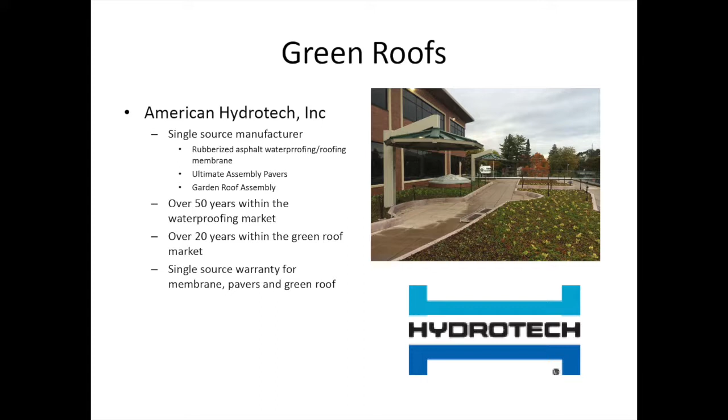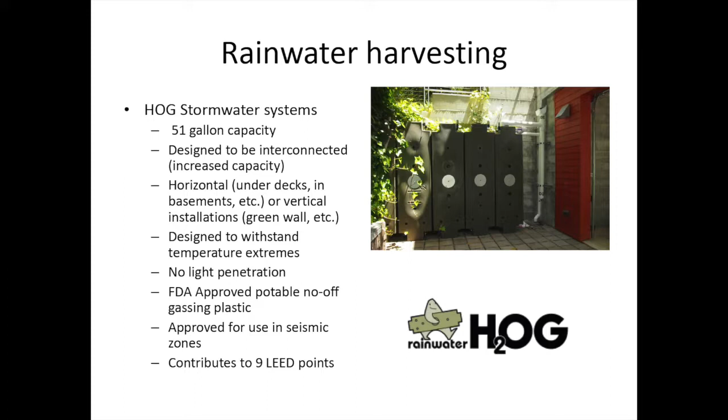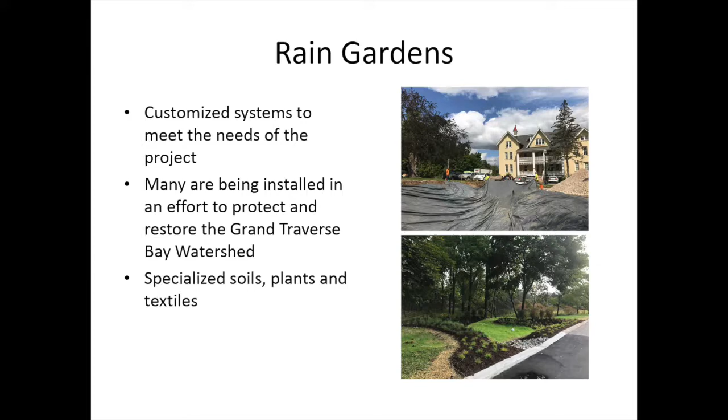Overall, a lot of the green roofs happening on Munson's campus and these rain gardens are all protecting Kids Creek, which is a main tributary to the bay, to West Bay.

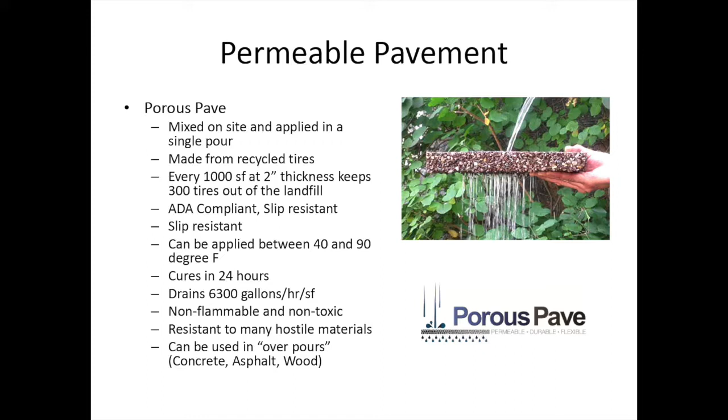Permeable pavement is another thing we get into. This company here is pretty cool—their systems are actually partially made out of recycled tires. Every 1,000 square feet of this product takes 300 tires out of the landfill. You can use this to move water through the system, and again, we're looking at the holistic approach to the roof, or to the site, of managing water.

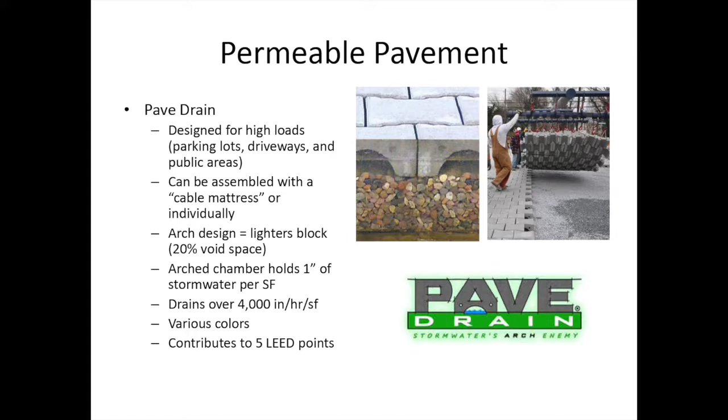Another more heavy-duty system here is called pave drain.

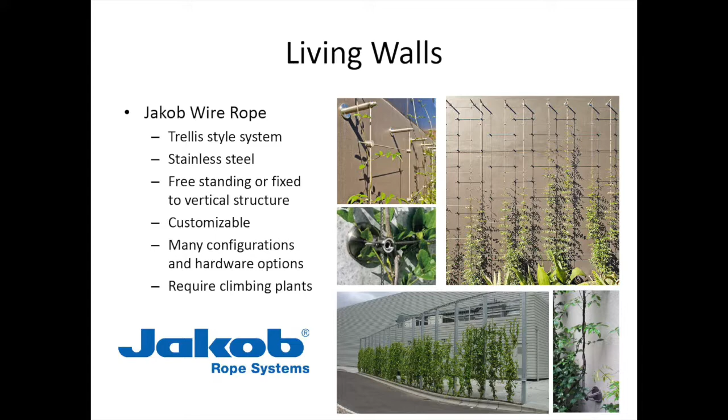Different types of living walls. This one here is a trellis system where vines grow up it, and the plants are actually in the soil and the ground. The main difference between them and these others is the soil, or growing media, is actually in the walls for most of these—these are structural walls that would replace your typical concrete block wall.

Another form of green infrastructure.

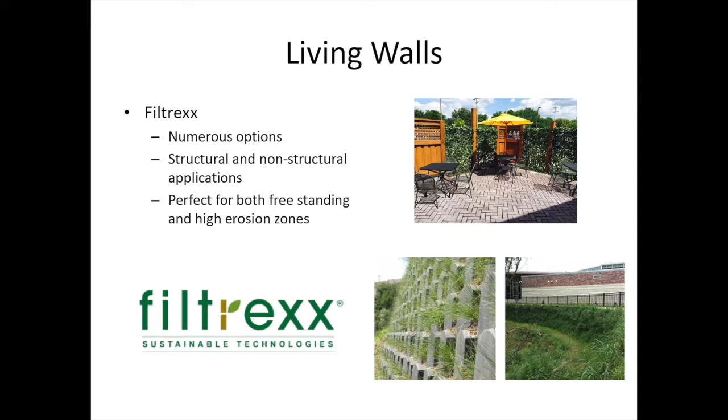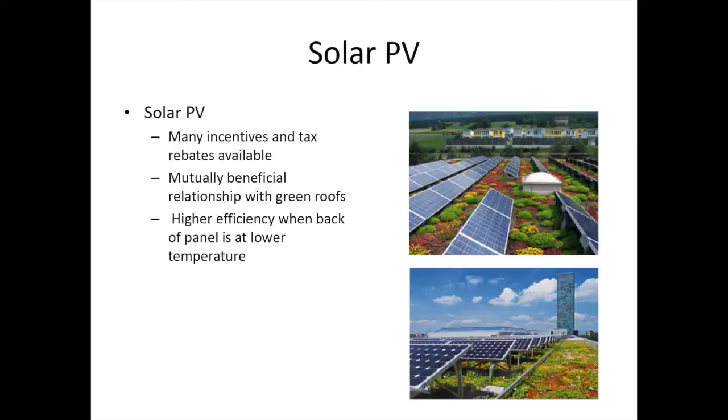We also consult on solar PV. You can see these here—these aren't our jobs, but they're from Germany. There are tests out of Germany and the United States that show solar panels actually producing at a higher efficiency than they do without green roofs, because the evaporative cooling effect of the plants cools the back of the solar panel and makes it more efficient. So it's a symbiotic relationship between the two, and overall it's a good double use of your site—you're managing stormwater and generating electricity.

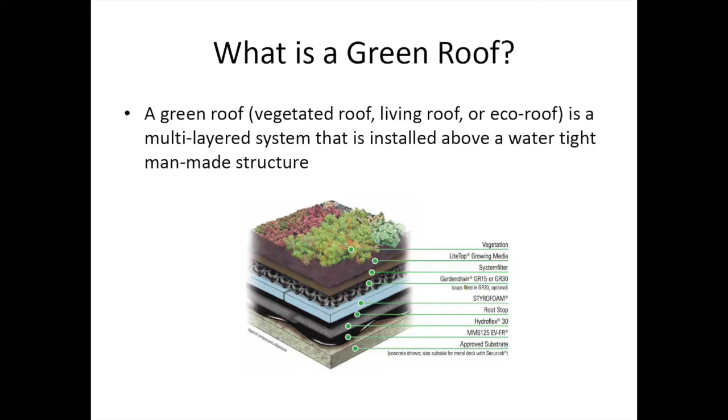So what is a green roof? The official technical definition is that a green roof is a vegetated, living, or eco roof, and it is a multi-layered system that is installed above a watertight man-made structure. So basically that's over waterproofing, and there are many layers that you need to consider.

I'll have this up here so anyone that wants to come look at it after the lights are back on can do so. But basically the bottom layer is your roof deck—that can be concrete or it can be wood. That's your roof.

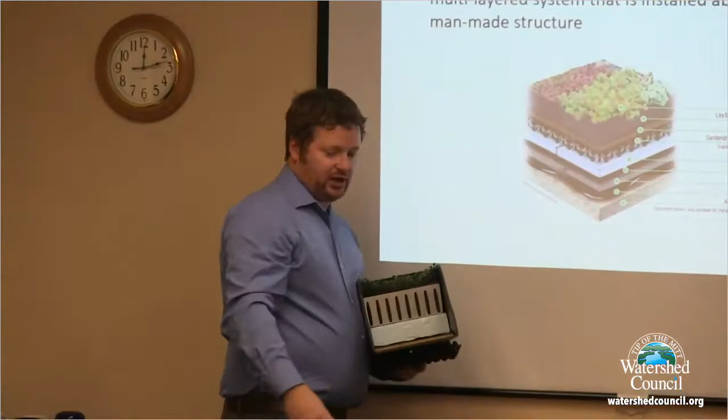And then you have your waterproofing layers, a root barrier, insulation, and your drainage board, which is here—this is going to hold water as well as drain it. Then you have a fabric that keeps all your soil from washing away, and your plants on top. So it's a lot of layers, but it's all there to mimic the functioning of the first few feet of soil at grade.

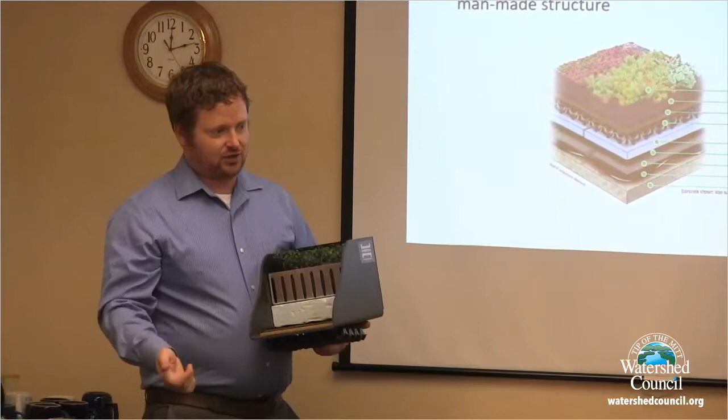It's going to drain, it's going to retain water, it's going to support plant and root growth with various pore spaces. There's air within that soil, so the plants and roots can breathe, and it's a really healthy environment. It's an engineered environment, but you're on top of a building, so it has to be engineered to do that. I'll keep this up here, and feel free, we can pull it all apart and check it out afterwards.

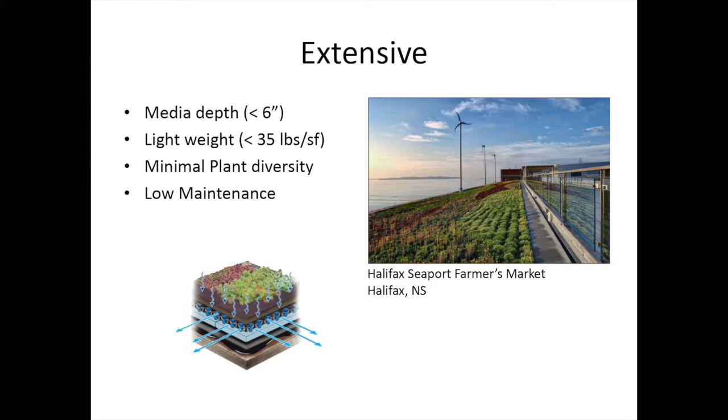So there's different types of green roofs. This one here is known as extensive—it's a shallower roof. There are two main types: extensive and intensive. And how I always remember that is intensive is heavier, so think of more intensive weight—that's a deeper system. But this one here is a lighter weight system.

It's less than 6 inches of soil or growing media depth. It weighs less than 35 pounds per square foot typically. The plant diversity is minimal, and that's because the root systems of the plants are shallow. So you can't plant a big ornamental grass in 6 inches and expect it to live, because its roots have nowhere to go. So that's where you're cutting off the diversity of plants, to anything that can survive in 6 inches or less of soil.

There's a lot there, but it is a more limited palette. It's going to be lower maintenance because of that limited plant palette. You don't have a lot of diversity there, but it is the workhorse of the green roof industry. It's a big sponge up on the roof managing stormwater, which is one of the number one reasons these things are used.

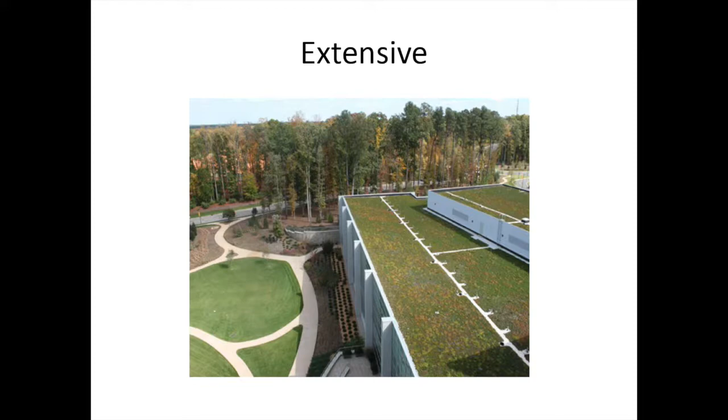This is a large campus—this is only a fraction of that project. This one's in Cary, North Carolina. They wanted to make sure they had zero runoff from their site, so they're managing anywhere from 40 to 60% of every rainfall on the roof before it even leaves the roof. That's a huge thing for the civil engineers to take into account when designing the overall infrastructure on site. Many communities actually require you to have them now, and this one did it on their own.

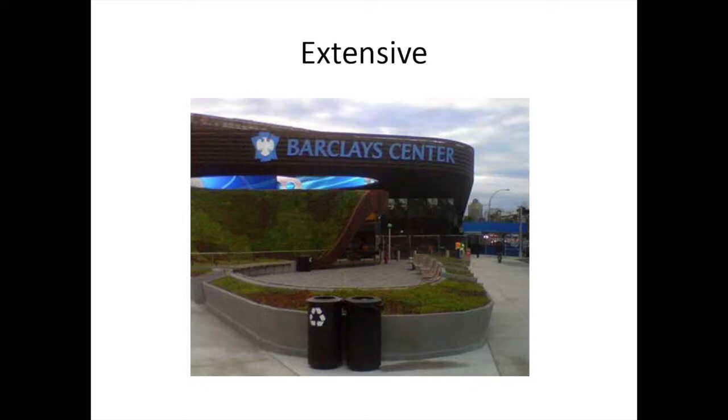This one here is more of an ornamental version of it. This is in Brooklyn, where the Brooklyn Nets play, the Barclays Center. You can see this is an extensive roof on a very steep slope. There's this product here that hangs down and holds soil on the rooftop, so you can go at pretty much any angle. So you don't only need to do it on a flat roof—this is a specially engineered system, but it's still extensive, or shallow.

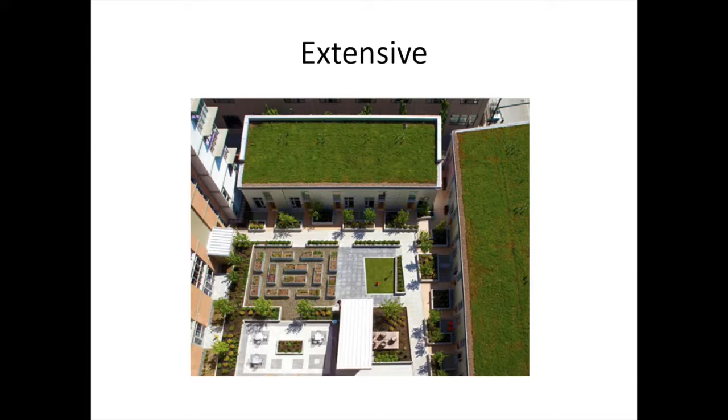Here's one that's another extensive roof up top, intensive down below. This is on the 7th floor roof of a development—or maybe it's the 4th floor, I took the picture on the 7th, I forget—but this is a project in Portland, and these are all community gardening spaces on the rooftop. This is actually a fire hydrant, and we had to design that so dogs could go up there and use the restroom. We engineered a special soil for where the urine would go down into the waste stream versus into the runoff, and rain barrels collected water they use for the gardening area.

So this is a zone that, when this was built, was in a sort of a rougher area—it's Portland, there's not a lot of bad areas, but this was an area where, to get buyers to come in, they needed to provide something special. And this is a protected space, a community gathering space, and an otherwise unused rooftop. In the past, there wouldn't have been any interaction with your neighbors at that level.

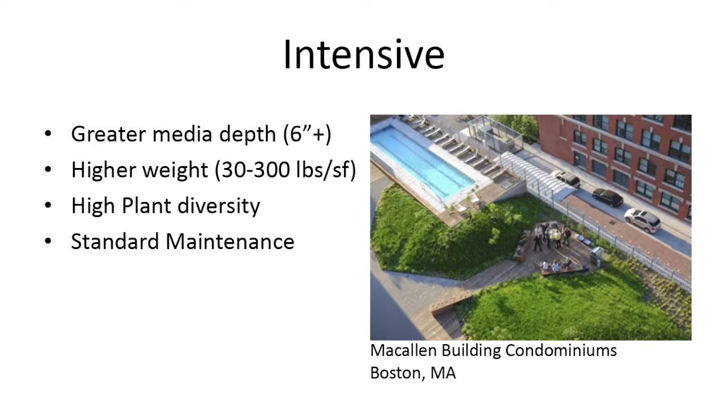This is on the roof again, a lap pool. It's at the same building as the one I showed you in Southie. This is the community space they built on top of their parking garage. They voted to move this into this type of space versus places to park cars. Some people don't have cars, so they decided, why not make it a barbecue area and a lap pool, a place you can go outside versus being trapped in your condo all the time.

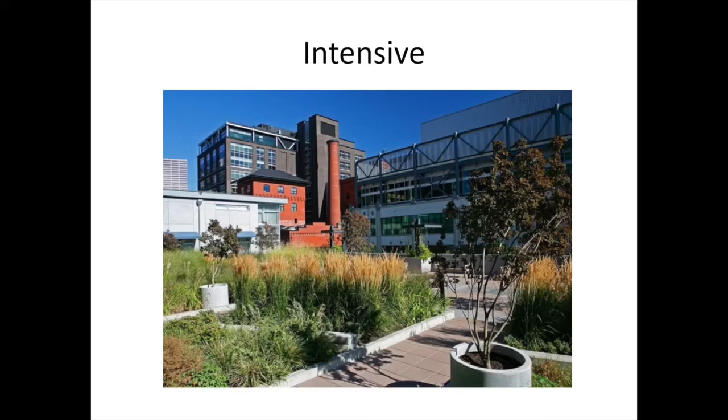So you're going to have a higher diversity of plants and more standard landscape maintenance, similar to what you'd have at your home. This here, believe it or not, is the roof. This is just showing you the diversity of what can happen on the roof with the intensive system.

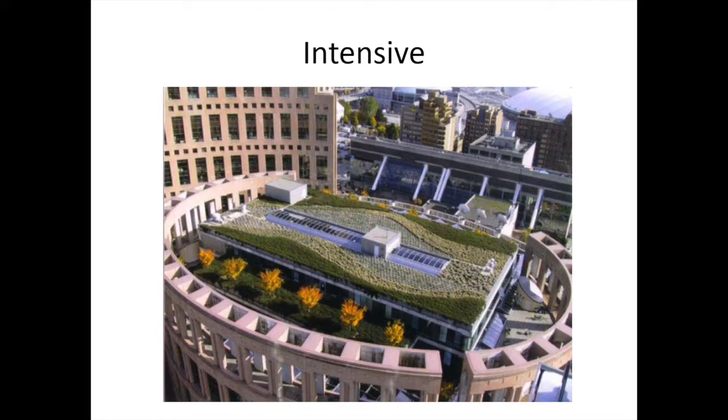This one here is in Vancouver, British Columbia. These are silver maples, and this picture was taken about a decade ago. Now the branches are interwoven—that's how big they are. The trees are huge, and this area right here is about 20,000 square feet, about a half acre.

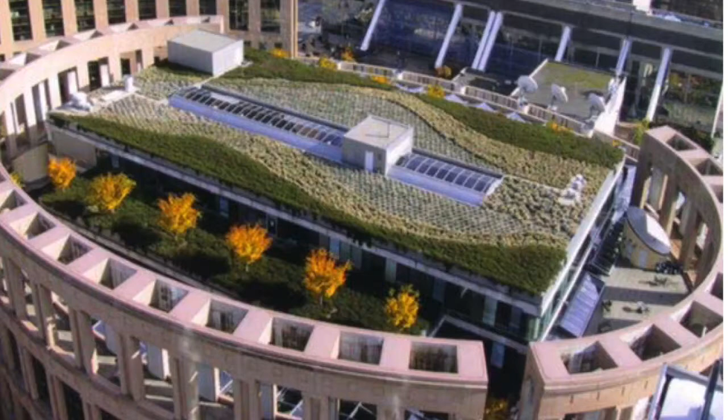I have a quick question—can you go back one? What about the root systems, how do you prevent them from getting too deep and affecting things? Great question—that's where the root barrier comes in. You have your waterproofing, and above that a root barrier layer, many different types. Most of it's high density polyethylene, or HDPE, and it's tested for up to 2 years typically in a lab for root penetration. You put that down over your waterproofing to make sure roots don't go into it. Penn State does that testing against the most aggressive root systems out there—you put it in and see what happens. You have to patiently wait for 2 years, and then you pass the test.

So what are some of those other plants? I see the maples, but these are all different types, like grasses. I believe this is blue stem right here.

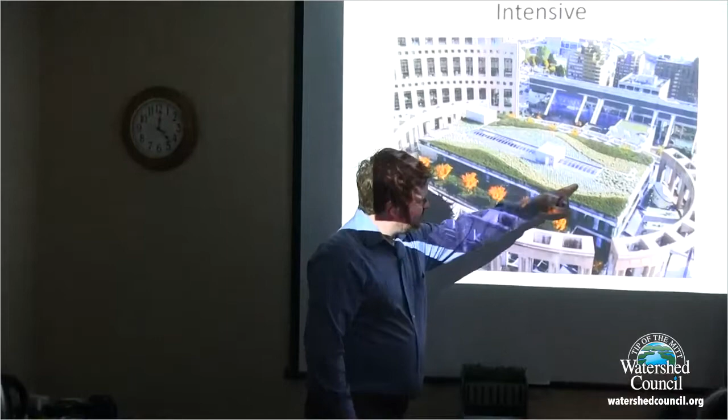I'm not exactly sure here, but they're all grass, grasses and other types of larger ground cover. I think this is some type of juniper, I believe, but I'm not exactly sure - I didn't design this one, I maintained it. I didn't help with the plants on this one.

A lot of the prevention also has to do simply with plant selection. You don't select plants that are going to be overly aggressive - like a running bamboo, for instance, you don't use anywhere.

But clumping bamboo is okay with the right precautions. There is a project though - and this is why working with a landscape professional is important, because some people don't know that. There was one where we told them, don't use the bamboo.

It was a hotel in Philadelphia. Don't use bamboo, don't use the bamboo, don't use the bamboo - but they used the bamboo, and within a year the roots had gone through the side of the concrete planter, all the way through it. It was right next to the pool, and it found its way into the pool system and all kinds of stuff. They had to rip it all apart and close the pool in the middle of the summer at a fancy hotel, so it wasn't a very good situation for them.

I'm sorry, I'll back up a little bit on the technology - I'll pass this around. So this garden drain product comes in various different sizes. This would be selected based on your water requirements for your particular green roof, because the cups are a little bigger in this one versus this, and there's even one that's shallower that I'm not sure I have a sample of.

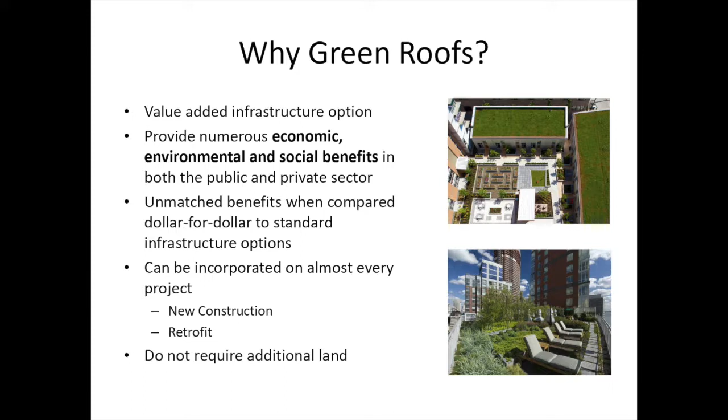You can look at this and ask, what's the benefit of having a break room off the roof so my employees can go out and have their lunch? What's the productivity you get out of that? There are all kinds of calculations that can be run to help compute that.

Dollar to dollar, when comparing it to other infrastructure options—for instance, a pipe underground that takes all your stormwater and dumps it into the bay—all your dollars are paying for is a pipe to dump water into the bay. But if you put that dollar into a green roof or other green infrastructure, you're getting benefits in multiple sectors in multiple ways for that same expenditure, while still doing the same thing: managing the water.

It can fit into new and retrofit construction. You can look at a building like this that can barely hold snow load, and then you can put more beams up there and figure out whatever needs to happen.

Retrofits are possible. Sometimes you find projects that are built only 2 stories tall, but they're engineered to hold 10 more stories above them, so you could park a couple semis up there and do whatever you need to do on the roof without additional structural work. Some structures are like that.

And they don't require additional land to provide recreational space. That's a huge benefit, and a huge reason to use it.

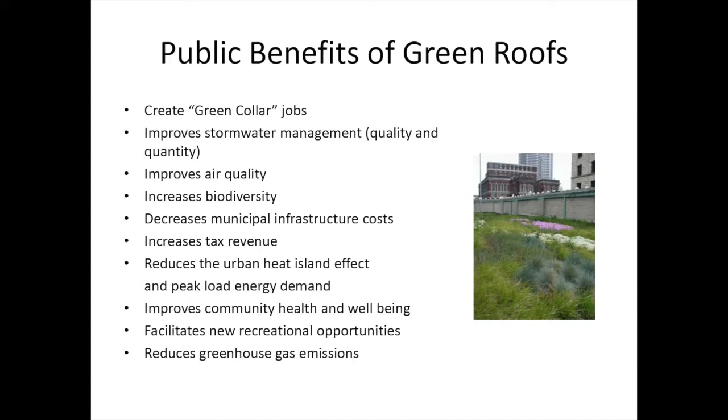The overall municipal infrastructure costs go down in places that are really dense. Even downtown Petoskey, if they have problems with the storm pipe down a certain road because it's 100 years old, if they're maintaining the water on site on a roof, it's not rushing in there and contributing to potential overflow of the storm system.

Increased tax revenue - these things increase the value of your building, so the city or community, the building's worth more money, and that owner is paying higher tax. Or that builder or developer can go out and sell it for more money. It's about 10 to 15% average, up as high as 25% more per unit in condo developments with this type of infrastructure.

It's going to minimize the urban heat island effect - that's your building heating up and heating the urban area around you. This is reflecting or absorbing heat versus it hitting on your membrane and holding there and transferring into your building. You have plants that are evapotranspiring, and I think of it as a force field that's cooling the air around it, so that heat can't get into your building. Even with an insulated roof, you're still going to have some heat transfer holding that membrane in a warmer environment than you would want.

There's new recreational opportunities - you talked about that a little bit - and it also reduces greenhouse gas emissions.

What about snow load? Great question. Snow load is engineered into the structure. So let's say this building, or any building - the engineer, number one, has to verify that it can hold the snow. And snow loads have changed in the last decades; 80 years ago, they didn't exist. Now you do the snow load plus the weight of the green roof. You can't transfer it - you can't say I want a green roof instead of a snow load, because you're still going to get snow. You engineer for snow and the green roof together. Does that answer your question?

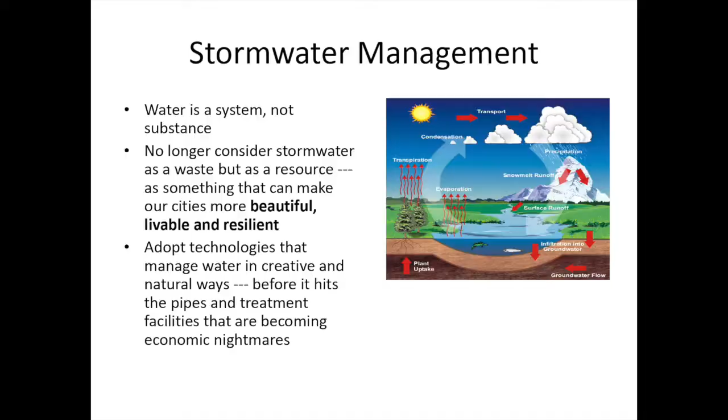Stormwater management - water is a system and not a substance. We're never going to get more water; it's not falling out of the atmosphere. All the water we have on the planet is here now, so it's moving in a cycle. These are helping replace a surface that used to be permeable.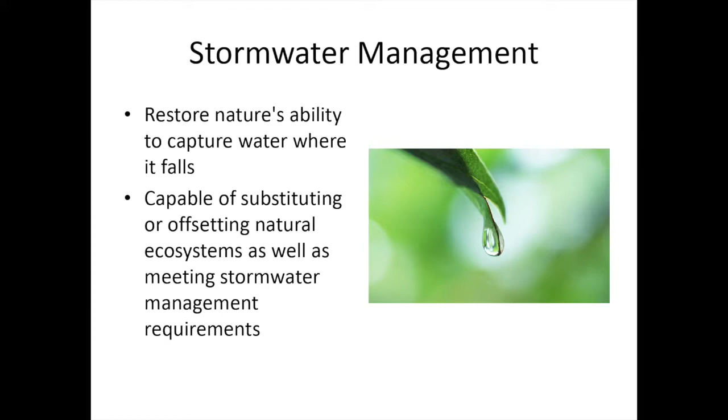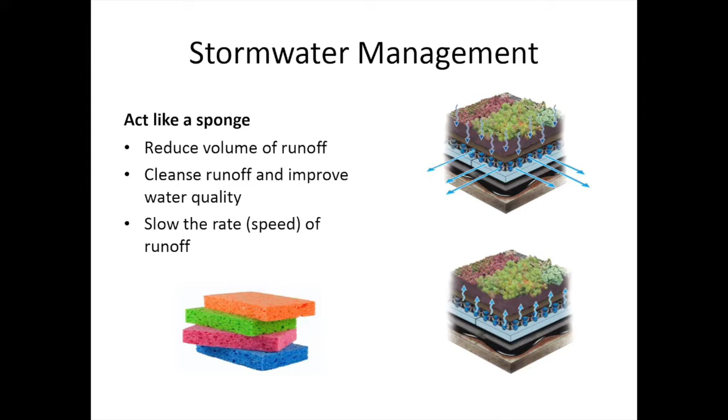I've had people argue, well, you're doing a development and putting an extensive roof up there, and this used to be a meadow or something like that. Yes, but it's better than not having that on the rooftop - that's usually what I say. I'm not the one, I don't own the property, so I'm just trying to help make it greener. It's acting like a sponge, and that's a good way to think about it.

Think of a dry sponge, and you put it under a tap, and you're holding it there until it's saturated, and right when it's saturated, it starts dripping out of the sponge. That's exactly how a green roof works. There's a capacity to hold water, and once it's ready, that's delay. So when you start putting water in there, the delay of when it starts to drip is what civil engineers are after.

Because that delays the water from flushing with all the other water out into the bay. That's typically about 2 hours for a drop that hits it to actually hit a drain once it's saturated. So that's the type of data engineers are looking for, and we can help with that. So it's going to reduce the volume, cleanse the runoff, improve water quality, and slow the rate that it's leaving the roof.

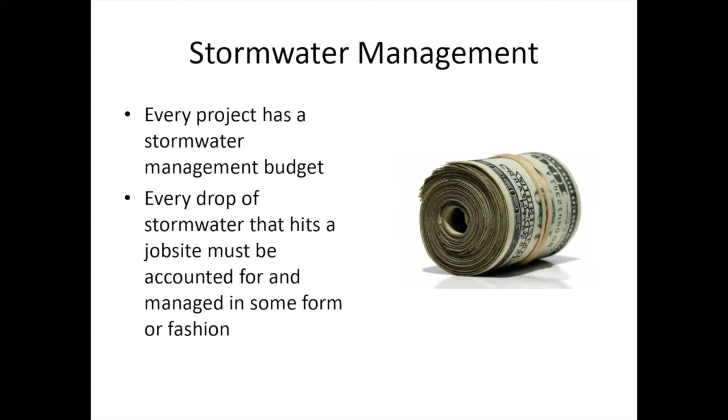Every project has a stormwater budget. If you're building a new house, whether you know it or not, you're paying somebody, be it your builder, landscape architect, civil engineer, or developer. Somebody planned to put the water that hits your roof and driveway somewhere. So even the most basic home has a stormwater management plan you're paying for. It's required by every municipality and every township. So with green roofs, you can actually take that budget and help roll it into a greener technology.

I've done that many times, where instead of paying an engineer to design big pipes underground at a new shopping mall, they could put that same money onto the roof and get all those other benefits we've talked about. So every drop, you have to manage it, and you have to show how you're going to manage it.

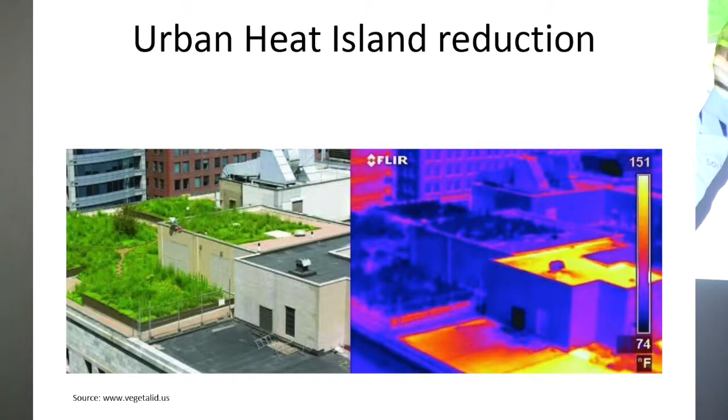We talked about the increased tax base. That's important. Urban heat island effect - this year, this is the Chicago City Hall, a demonstration roof. This is one of the first ones in Chicago that helped really kickstart the movement. It's about 15 or 18 years old now, but it's a very diverse roof. It's on 50% of the roof, and you can read all the data about historic stormwater management and the reduction of air conditioning requirements on that side of the building.

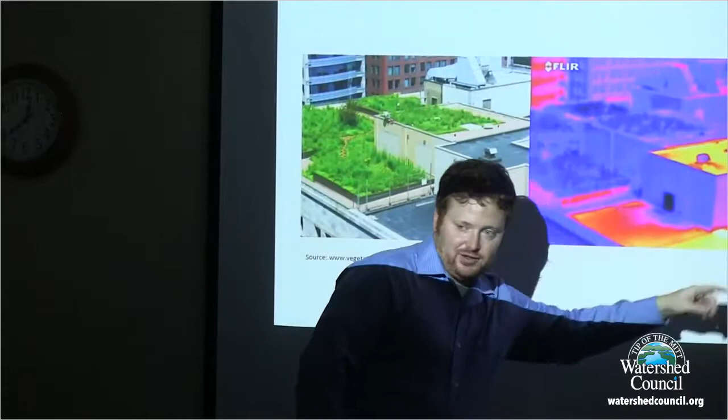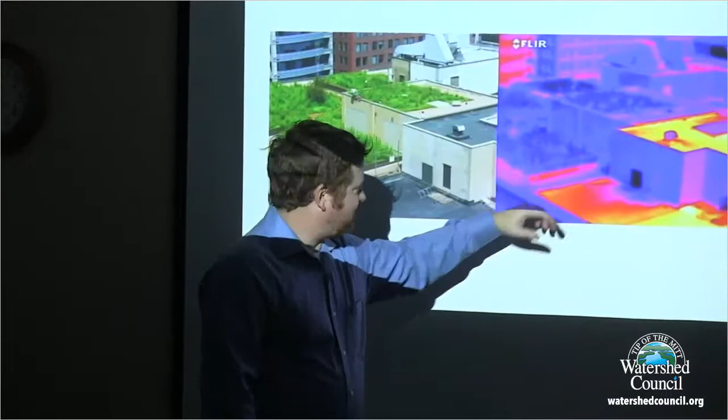But here it's very clear that everybody can see - it's a FLIR image of this site, and you can see where the green roof is. It's dark blue down in the 74-degree range. But then you look over on the hot areas, where it's closer, it's not as hot because there's not as much going on. But this white wall, the reflection of that, is burning hot - 151 degrees. So by blasting your membrane with that heat, you're weakening it, which increases the likelihood you'll have to replace it.

So I always think about it as a paper clip. If you have a paper clip and you straighten it out and start bending it, that's one day - that's your membrane heating up. You bend it back, that's it cooling off. You bend it back, and eventually you're going to break your paper clip. That's the same thing happening in your membrane - it's heating up and cooling down, heating up and cooling down. It might take 12 years of that, but you're going to get a crack in your membrane and you're going to get leaks. So green roofs protect it - it's underneath and doesn't get that UV ray.

So private benefits - how is it going to benefit you if you put one of these on your structure? Aesthetic improvements, it's going to look better. That's a big reason a lot of the ones I do on residential properties - they like how it looks, and that's their number one reason. But then they also benefit from the stormwater management or the cooling benefits that can happen there.

The energy savings is the one, because on most residential homes, if you have one, the evaporative cooling effect that happens from those plants is keeping the heat of the day out of your building. That either helps you, if you have central air, not have to turn it on as much, or if you don't, you might be able to avoid central air altogether if you do it right. So that's an energy savings there.

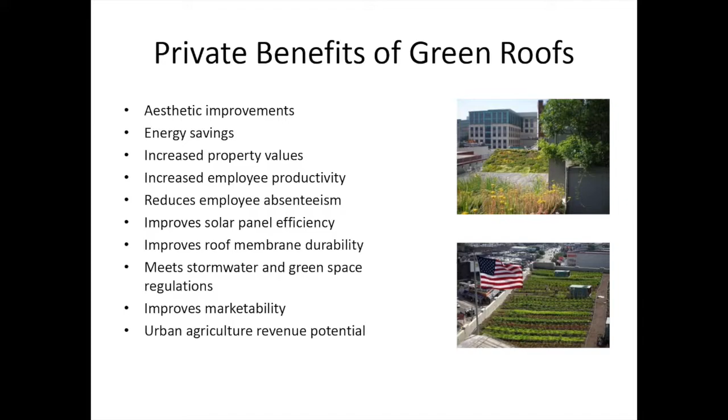You're increasing the value of your property by having this, because if it's a commercial building and you have a green roof, you can say you likely will never have to replace your waterproofing membrane. Where if you buy a commercial building, you figure ten years down the road you'll have to spend a hundred thousand dollars to replace the membrane. That's part of your calculations as a buyer. So that's another benefit: increased employee productivity and reduced absenteeism.

Absenteeism is proven, there's tests and data on all of that. We talked about the solar panel, we talked about the membrane durability.

Meeting stormwater and green space regulations - places like Denver just passed this. Any new commercial building over a certain square footage has to have green roofs or solar panels. That's a mandate, it's not a choice. San Francisco has a similar thing, and so does Toronto, and various other cities have different levels, but those three cities are the first ones to mandate it. There's a lot of fight from the developer and manufacturing sectors, but people are holding strong because those people are contributing huge roof space to all of our infrastructure, and it's costing everyone money.

So now you can use this to meet your stormwater requirements for your site.

Improves marketability - that's sort of a greenwashing one, but if you have a business and you have an awning with grass growing on it, people are going to be like, well, that's cool, and they might walk into your shop.

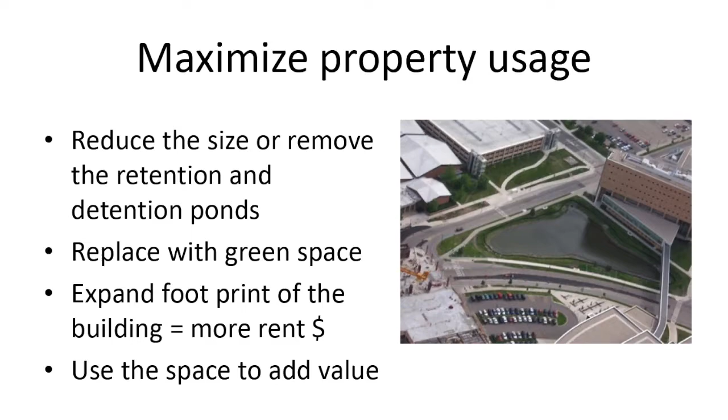Maximize your property usage - I've told you these roofs will hold a good percentage of your rainfall. This is a campus, I forget which one, down in the southeast part of the country. But this huge pond - all these buildings and parking lots are all running to that pond, and they're capturing it there. But if all those buildings had green roofs, they could put another building there.

They could have a community center there for their students, or have it as green space. But instead they have all this water rushing in there, and it's really a waste of real estate. So if you can manage all that water up top, you can add more value to your property.

So there's policy work that's been done. I actually, as a policy educator for the industry, helped create these two documents. They're available online, and if you want to grab my card and ask me to send them to you, I can send them to you in PDF.

This one's about 150 pages, and it goes through every city and the incentives and guidelines they have for the requirements for green roofs. Washington D.C. will give you $12 a square foot towards your green roof if you do it, because it's cheaper for them to pay for your green roof, or in part pay for it, than it is to fix the pipes underground. All that water leaving your site would cost them more than $12.

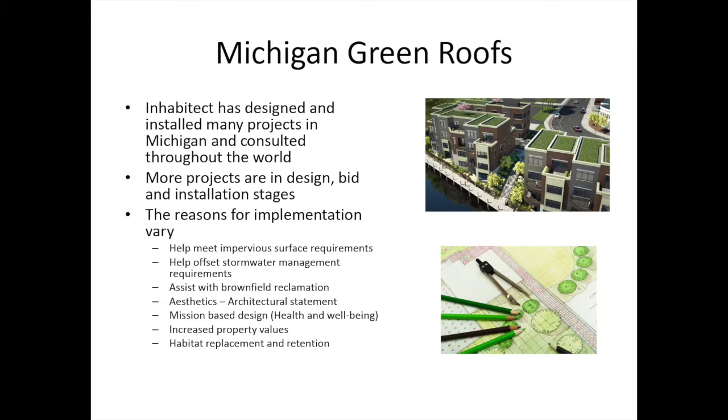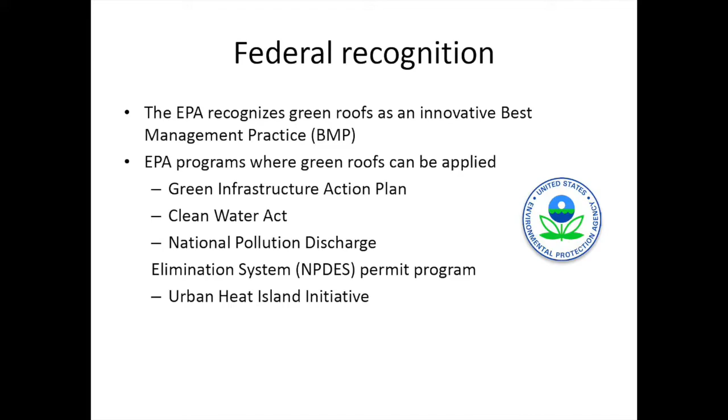But the programs that are talking about green roofs are the Green Infrastructure Action Plan, the Clean Water Act, the National Pollution Discharge Elimination System, and the Urban Heat Island Initiative. Those are all things within the EPA that call out green roofs from the federal level. I don't know how our current administration has changed that, but time will tell. These are all things that are documented and help people like myself or companies like me talk to architects and policymakers in regions and say, hey, the EPA is saying it's okay. So they'll work within your program.

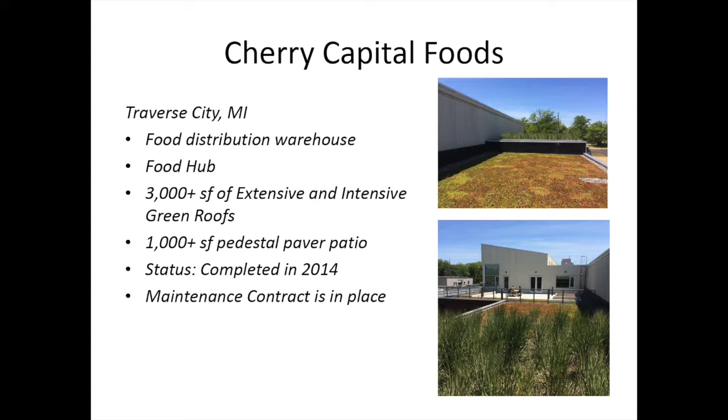So, I know we're getting towards the end, and I'll just go through some regional examples real quick. Cherry Capital Foods—we did that in 2014. It's a pretty cool place if you've never been. It's a food distribution warehouse, but it collects from all different small farmers and small food producers, and underneath this green roof are all these little offices, like a kombucha maker and a cheese maker and a lot of different things going on there. Then they all, when they produce their food, just carry it across the hall, and there's the distribution right there. So it's a great spot.

And really that's another real thing—talk about employee satisfaction and employee retention. If you have a business like that, it's a great example. We go there to do maintenance once in a while on that roof, and there are always, every day, employees out there either working on sales, working on a project, or just having lunch and socializing. So it adds immensely to happy people.

Here too, these two beds—this is earlier in the spring, before anything's showing—those are deep areas that they created as garden spaces for their own herbs. So their employees have tomatoes growing or lettuce growing, and they can go out and water it, and pick it for a salad or whatever it is. So the employees can actually have a garden if they want.

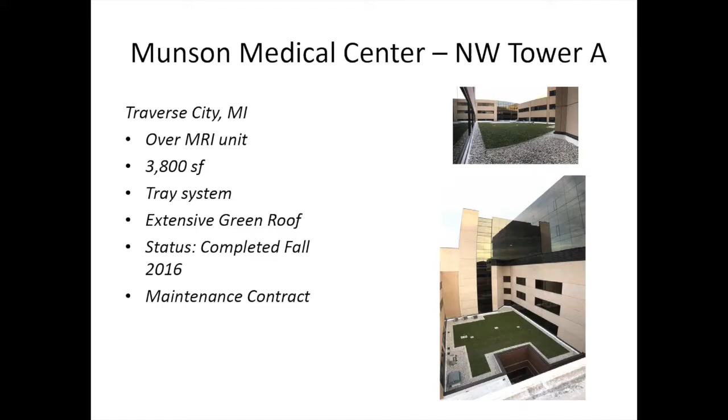Yeah, they're there. And here's another one at Munson. This is another one they centered on this because all the runoff from the surrounding building. This will help again slow water down from hitting that creek. We also did, there's a lot more coming up in that area.

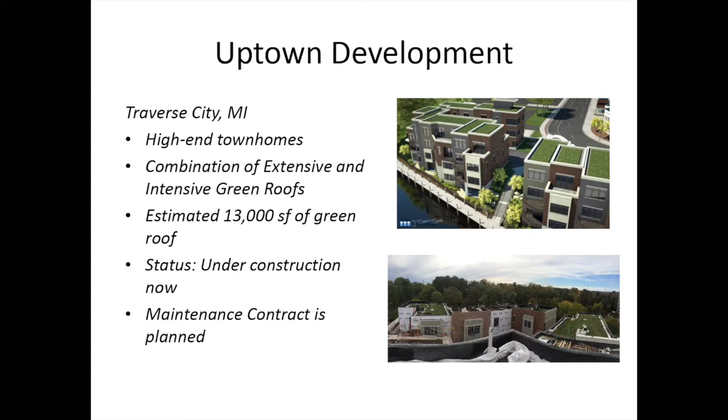This one is a very dense development, right on the Boardman River, and some people hate it. It's not the prettiest development, I'll agree, but they had the right to build there, so I can't tell them - that's beyond my job to say who can build what where - but they did green roofs. All the water that's hitting there, they're slowing the majority down before it hits the water. They have a rain garden where the water goes into it to help slow the water down before it hits there. And in my opinion, this was a gravel parking lot before.

It used to be a dump. The whole reason was when they were digging for the basements, they were digging out Model A's and stuff, and old women's shoes with the real points and laces, ink wells - it was cool. I'm a treasure hunter kind of guy, so it was fun - I got a whiskey bottle from 1860, fully intact. So it was a garbage dump, and they removed all of that. It was a brownfield site, and now they're getting something out of that property. So I'm for this type of work.

It's over 13,000 square foot of vegetative roof. Some of them have elevators that pop up, and they have gardens and everything. Not a low affordable housing type situation.

So it was a dump next to the Boardman River. It used to be a bus station after it was a dump. There was a big fire in Traverse City in the late 1800s, and it was also a dump - they basically pushed a bunch of burnt stuff and garbage and threw it on the river and covered it. Then there was the bus depot there for decades, and then it was a brownfield site. Now it's 16 high-end homes and taxpayers densely packed right into this little acre-and-a-half site, tiny. But now they have 16 well-off taxpayers. So to me, they cleaned it up and eliminated the runoff into the river.

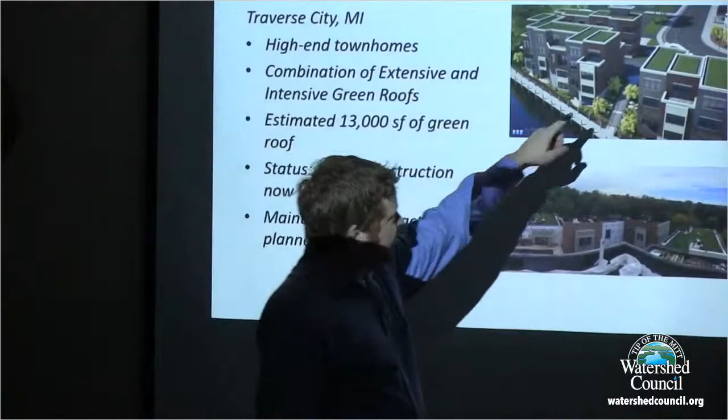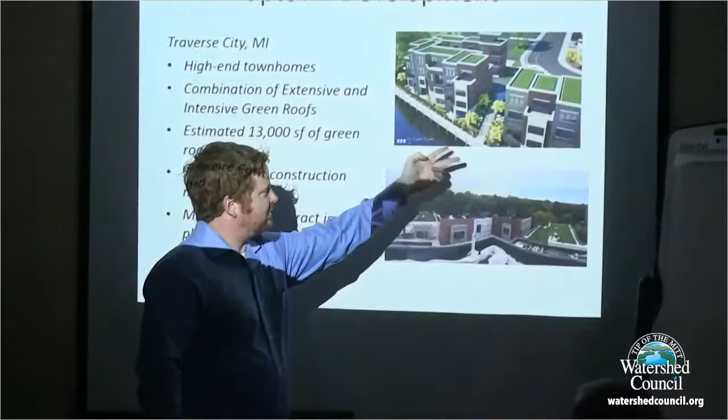They created a living edge too, and they're adding this boardwalk. This is Pine Street right here, and J&S is right down the block - the little hamburger place downtown on Front Street. They actually helped pay for this development. They also put a bridge over the river to connect two neighborhoods that weren't connected. So this development did a lot of good things, and part of their sale to the community and getting it signed off was vegetative roofs. Developments on the river are also helping the boardwalk for a greater Traverse City urban river - connectivity was part of it. Overall they did what they could to be more sensitive to the neighbors, and part of that was the green roof.

Then I do small little educational ones. This is at the Barns in Traverse City, the old state hospital grounds.

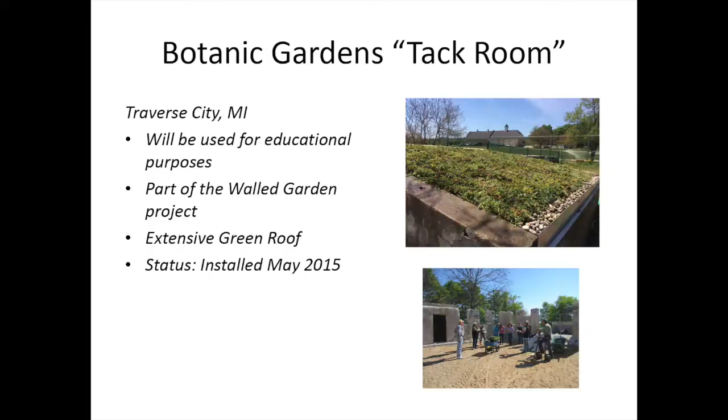This used to be a horse barn that for some reason they tore down in the 40s or 50s. It was a beautiful old hay barn. But this was the tack room right here, and I worked with the Botanic Gardens and the Master Gardeners group, and we did a little demonstration green roof to teach people about it.

Now inside that walled garden is a wedding venue. It's beautiful, and they show off the green roof and the technology so people can come up and actually touch it and learn about it. This is right in your neighborhood, close here, Boyne City Hall.

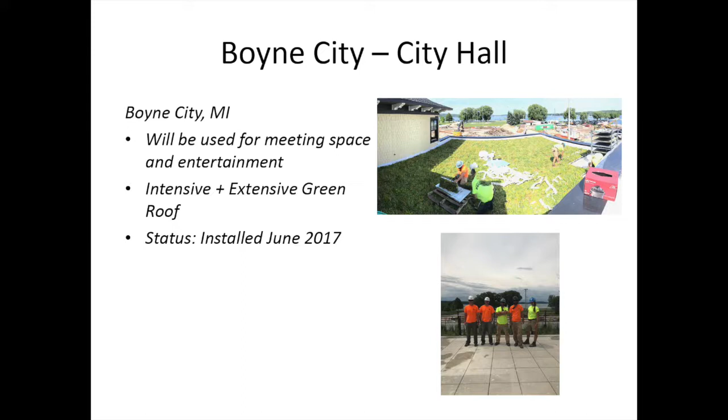We did that one. There's a meeting area right out of the main chambers of City Hall, I think it's the City Hall group that will be there. But we did that last summer.

Is that in Sault Ste. Marie? Yeah, on the government building, the new one. And those are all sedums? Yes, all different types of sedum. They put down a sedum carpet, it's called, about 13 to 15 different varieties, and about 6 survive. You put it down with 13 or more, and then they figure out which ones will grow there.

It's the microclimate, so you'll get different ones growing on one part of the slope and a different one elsewhere. It's sort of a shotgun approach, you see what happens and what's going to be there. These are all adapted, non-invasive varieties, so there's sensitivity to that, meaning they'll grow here but won't take over the woods or something. But we find all kinds of crazy stuff up there.

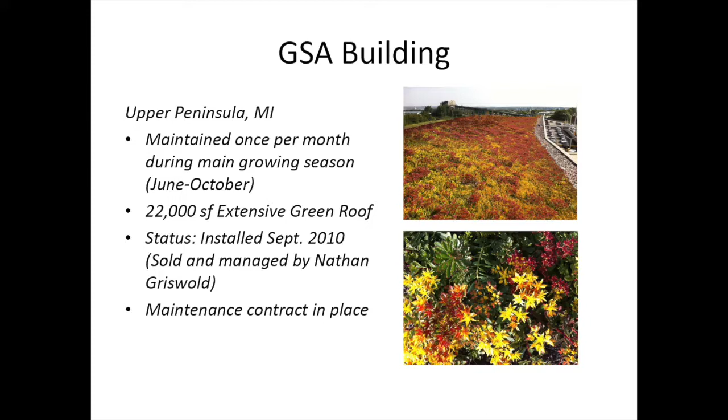So this is a really large one that you can see. A quick story - to get in there, you have to have security clearance and go through all kinds of checks to get in there. It's interesting.

Can you give a cost? Yeah, that's in addition to the waterproofing. This one cost in the neighborhood of about $16 a square foot to install.

But that can go down, and that's for 1,000 square feet. If you go larger, it can push down towards $12-14. But if you go smaller, like right around 1,000 square feet is really where the price starts to increase. If it's 200 square feet, you're going to pay like $24, because a lot of that's mobilization and getting materials shipped.

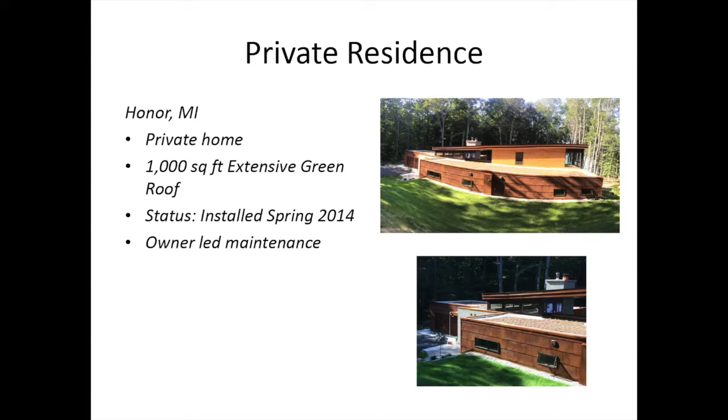Another home, this is right after it was planted. It was planted with plugs of a lot of different perennial sedums and other small grasses and forbs. They're sort of private, so we haven't gone back to take recent pictures. But this is another very custom house, very modern, with only 2 bedrooms.

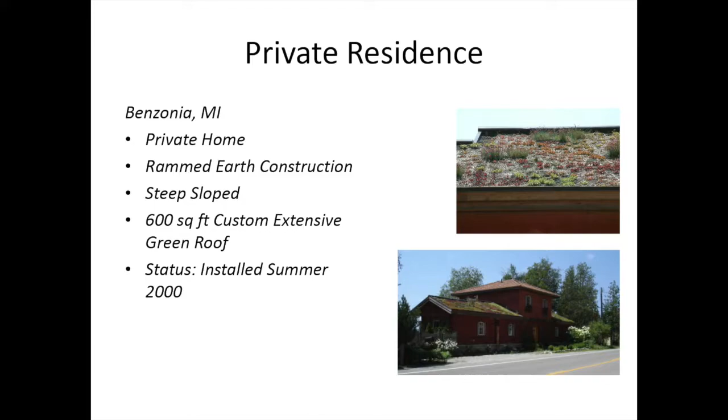Very open. This is the first one I ever did, way back in 2000, so I guess it's about 15 years officially, but this is the first one I did while I was in college. It's on Crystal Lake in Benzonia, Michigan. That's actually a rammed earth home. There's no insulation in the house other than that; it's about 18-inch thick walls of mud and straw. No corners, it's all rounded. So that was the first one I ever did.

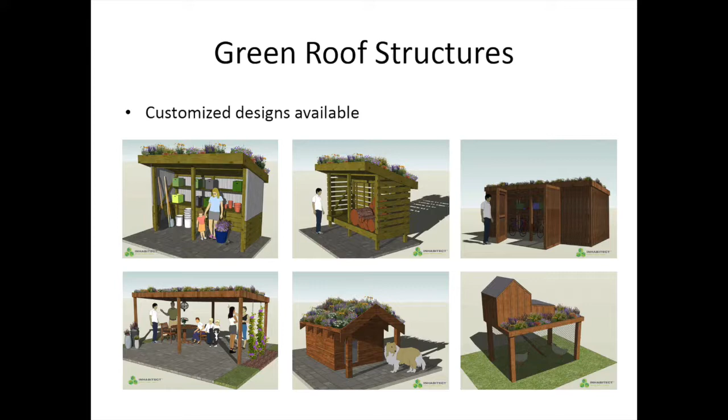We could do these cool little structures too. I have a wood shed at my house like this, and I put a door on it. My mom and stepfather have a wood shed and a dog house with it. So it doesn't need to be big. If you want one just to show people, or because they're cool, you can do small ones. I got a chicken coop too, and he's got a chicken coop at his house.